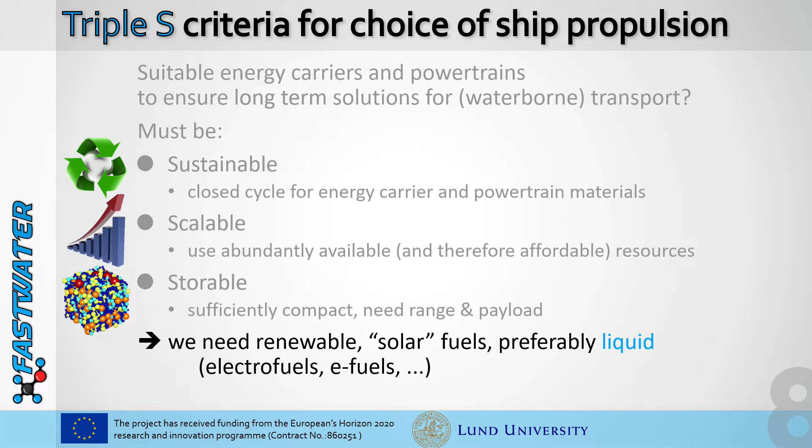So if you combine these things and then look at what we set out to do within the FASTWATER project, basically we see we have to go for renewable energy in the long run. So green electricity is what we will power a lot of things with. And this is sustainable, this is scalable. It's a huge challenge to scale up renewable energy, but we know we have enough of it, so that's a comfort. And then look how we can actually make that manageable, that green electricity.

How can we power heavy transportation with this? So then we need to look for things with which we can store that power. So we're looking at producing green hydrogen. We're looking at capturing CO2, carbon dioxide. These are things that are abundantly available, so that answers the scalability issue.

So once we start building things from these scalable resources, we need to build smart things, and we think that methanol is a very smart choice. It's the simplest hydrogen carrier that is liquid at atmospheric conditions. So that makes it storable. Having a liquid means that the number of applications you can tackle with this is much wider.

On the use of methanol, obviously CO2 will be liberated again, but if you start from captured CO2, you set this up in a closed cycle, so you don't emit any net CO2. You don't contribute to any CO2 rise in the atmosphere.

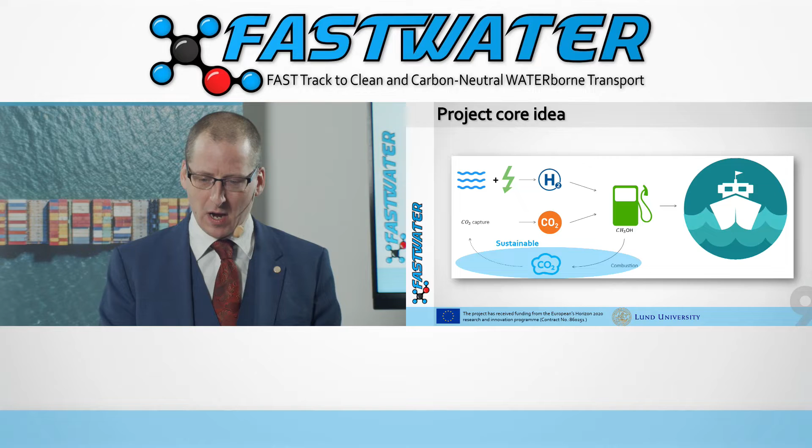So over 3 years ago, we started thinking, okay, there's a clear need for an alternative in maritime. We think this is a really strong candidate. We weren't the only ones thinking that. We saw a lot of interest growing around us. But we also saw that there were a number of challenges that still needed to be tackled.

So what we identified 3 years ago is that, first of all, a number of people really wanted to start moving into this, but were hindered by the fact that there were no methanol engines commercially available, in the power range of let's say 100 kilowatt to about 10 megawatt.

I'm happy to say that the first engine has now been launched commercially within our project. More of that you will hear a bit later this morning.

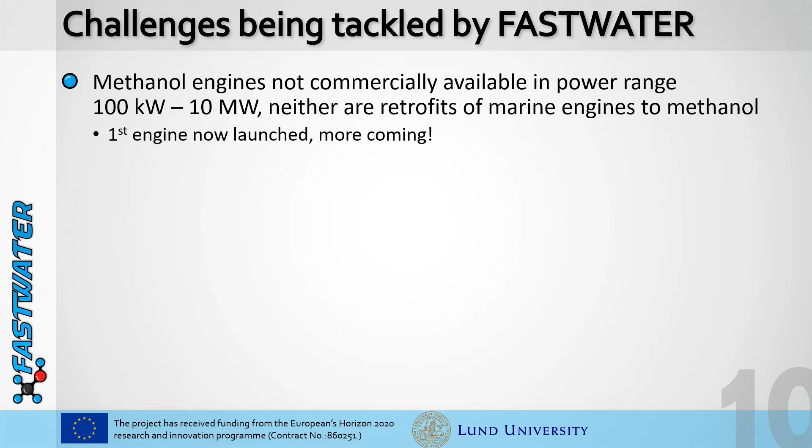A second big challenge was, okay, we need to move away from fossil fuels. Once you start looking into different fuels, it's a whole value chain that you have to start changing, from producing renewable fuel up to actually sailing on this renewable fuel. That's a daunting prospect. We needed to have demonstrators out there. We have managed to do that, and stay tuned for the following talks going into each of the parts of this value chain.

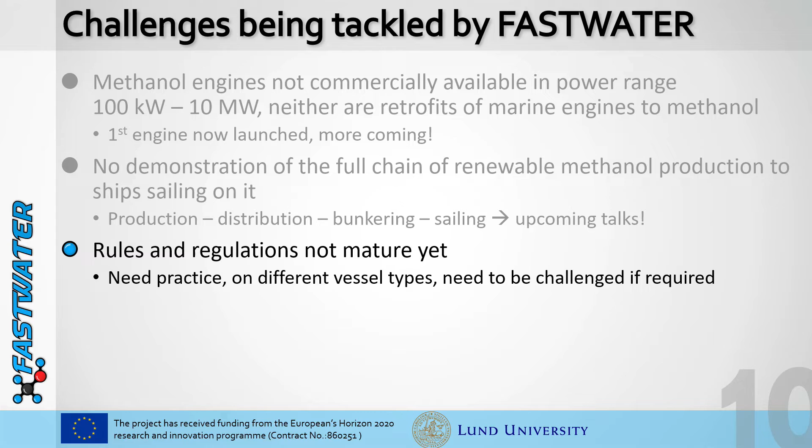Then also important, of course, is that very frequently a hindrance to introducing new things is rules and regulations. There were embryonic rules and regulations a couple of years ago. It was possible to do this, but again, we lacked experience with them. We lacked demonstration on different vessel types to really get this into our fingers - what works, what doesn't work, how should we tackle this?

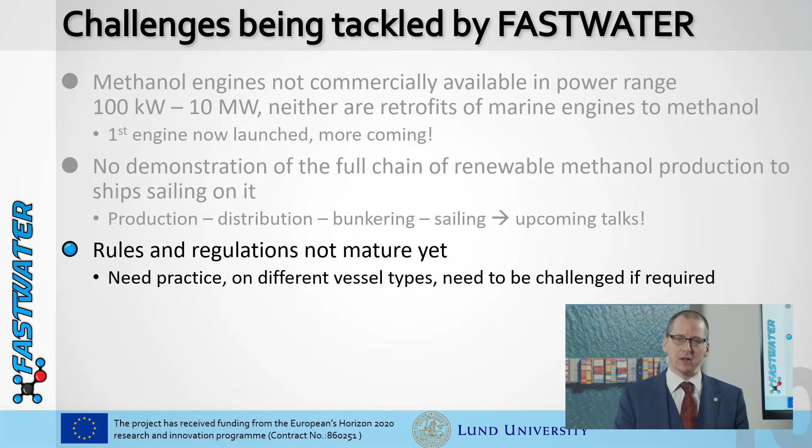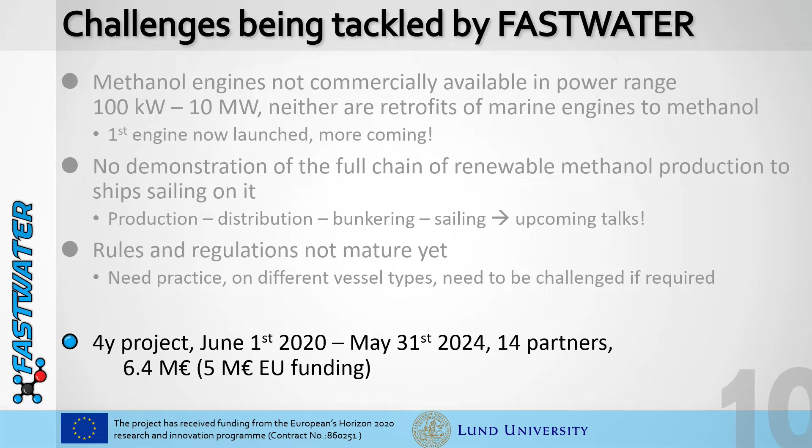So recognizing these challenges led us to submitting this project proposal to the European Commission and then getting it funded. We started about 18 months ago, June 1st, 2020, with a 4-year project with 14 partners that I'll show in a minute. So what we are doing on a daily basis now is working on engines, working on different methanol engine technologies, working on different power ranges to really make these commercially available. We have the first products out there already, and more coming soon.

But ultimately, these engines, of course, they need to end up in vessels. So within this project, the one you are going to hear about today is the launch of the pilot boat. You're going to look under the hood in a couple of minutes. That's our first demonstrator ahead of schedule. I'm very happy to report.

Besides that, you also see on the top left a tugboat that's going to be operated in the port of Antwerp in Belgium. So less than a year from now, we will hopefully have a similar launch event to also launch the first methanol-powered tugboat worldwide. And then on the bottom right, you see a Coast Guard vessel - that's 2023 we're looking at. We're going to demonstrate that in the coastal waters of Greece. And then simultaneously, we're also working out the design of a river cruise vessel, what it would mean to convert such a river cruise vessel, that you see on the bottom left, to the use of methanol.

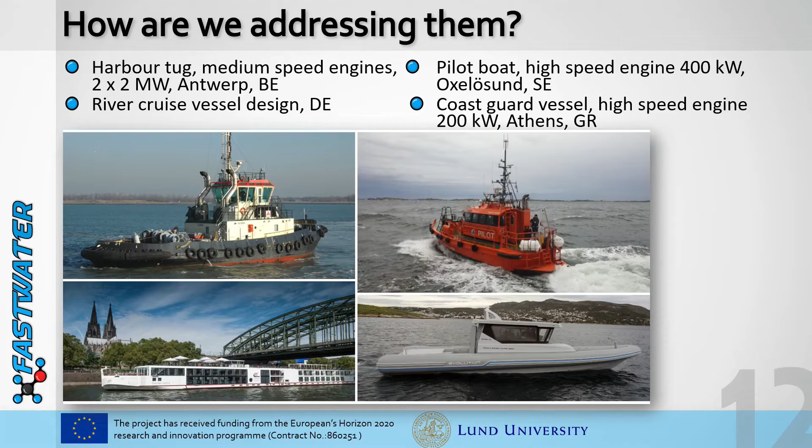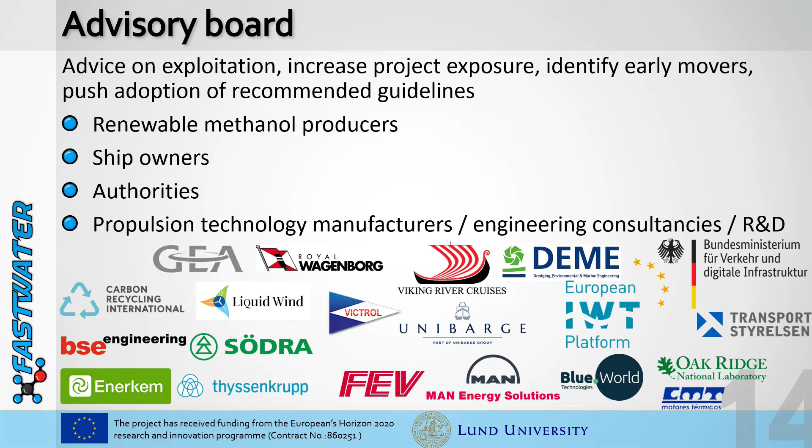So that's a number of partners, of course. I've already mentioned that quite a number of pieces of the puzzle have to start lining up to make this happen. So we're spanning quite a number of different partners from fuel suppliers, ultimately, of course, to vessel owners such as the Swedish Maritime Administration. Even that is not enough, so we're very happy to have these partners on board, but we're equally happy to also have quite a number of partners on board in our advisory board that helps us with advice on how to really make this a reality, how to exploit this, where to identify early movers, to help us out with these guidelines, to tweak them so that this all becomes feasible.

So with that, thank you very much for your attention, and I'll happily pass it over to Mr. Eelco Dijkstra from the Methanol Institute.

Thank you very much, Sebastian. Good morning, all. First of all, a great thanks to the Swedish Maritime Administration for hosting today's launch event and for giving us the opportunity to present briefly to you.

On the off chance that you may not have heard of the Methanol Institute, it is a global industry association. We represent the world's largest methanol producers, methanol distributors, technology providers, and increasingly also methanol consumers, especially also on the shipping side. Companies like MSC, Oldendorff and Maersk are all members that have joined the Methanol Institute over the last year.

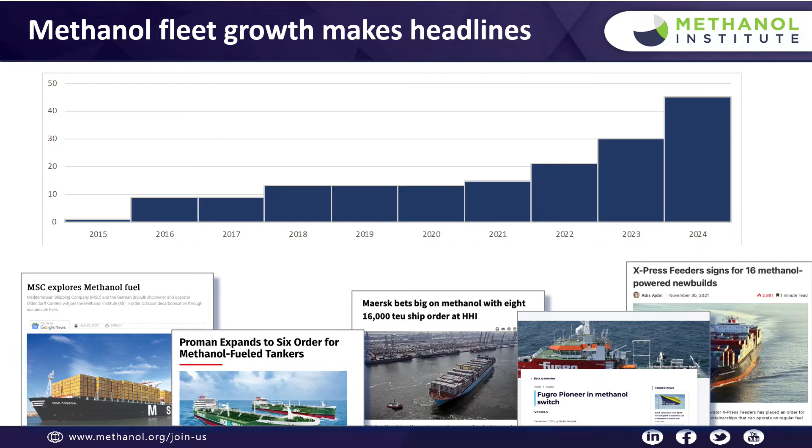Speaking of use of methanol as a shipping fuel, you only have to open up a shipping magazine or read a maritime website and you see all sorts of articles and headlines about promises of climate neutral, sustainable alternative fuels. What sets apart the different headlines, whether it's the announcement from Maersk of the 8 container vessels, or X-Press Feeders with their 16 feeders, or the 24 million euro subsidy that the Dutch government has provided for a methanol project with companies like Fugro, Van Oort, Boskalis and many others, is that methanol is not 5 years out. Methanol is happening today. We have approximately 45 methanol-powered vessels on the water today or on order.

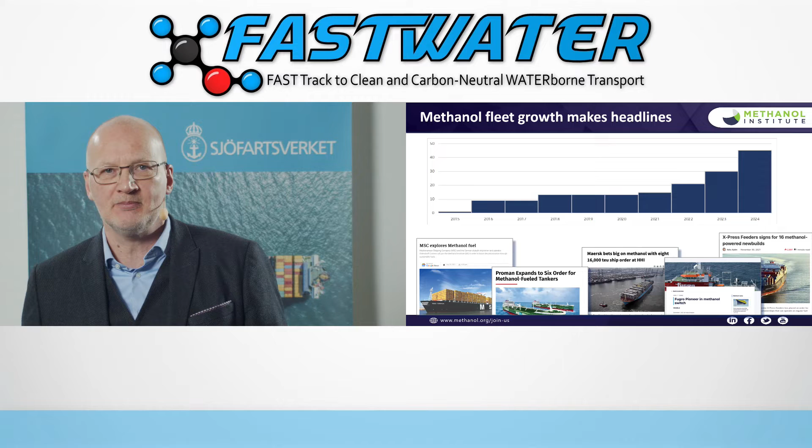There are more vessels on order as we speak, and it's only a limited amount of time before we will see the first 4-stroke engine, and really almost all major engine manufacturers are working on their methanol solutions. But the question is why are people looking at methanol as an alternative fuel? We had 2 speakers from the Swedish Parliament here today.

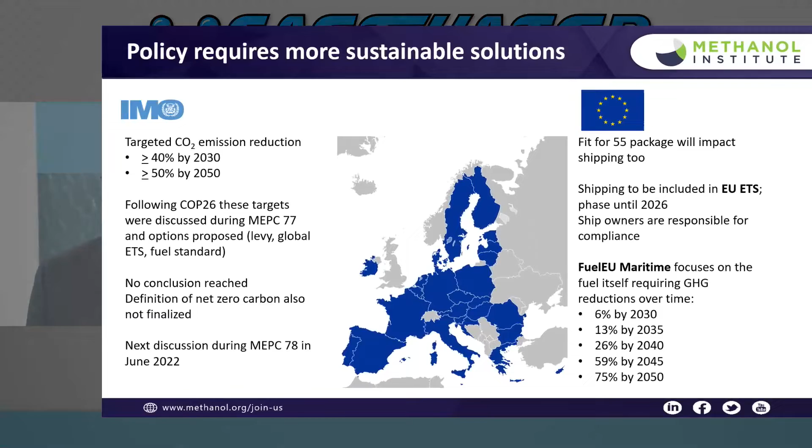Policy is an important driver behind what's happening in the shipping industry. And we tend to forget that actually the first driver for the shift to methanol as an alternative fuel was not CO2, it was the introduction of the sulfur emission control areas by IMO. So in 2015, Stena Line introduced the Stena Germanica that operates on methanol in the form of a retrofit.

Since then, CO2 has become much more of a topic in shipping. On the international stage, we have the IMO that is trying to drive the international shipping industry to lower carbon emissions, starting with 40% by 2030 to a 50% reduction by 2050.

But you can imagine that if you try and do this on the global stage, it's quite challenging, because where Western member states, Western countries and Western stakeholders feel that IMO is not moving fast enough, we have other parts of the world that are saying, well, hang on, we're going too fast. They can't even agree on the definition of what does it mean to reduce carbon. Are we talking about tank to wake, or are we talking well to wake? So it's still a very complicated discussion.

And so despite all the optimism at COP26, I'm afraid that it will still take IMO quite a long time to come to an agreement.

And then on the other side, we have the European Union. The European Union introduced the Fit for 55 package in June this year, which has implications for a lot of different industries, for a lot of different energy carriers. And in that package, there are two specific pieces of legislation that have a very big impact on the shipping industry. On the one hand, Europe aims to introduce the emission trading scheme for shipping as well, meaning that gradually, as a shipping company, you have to start paying when you're emitting carbon.

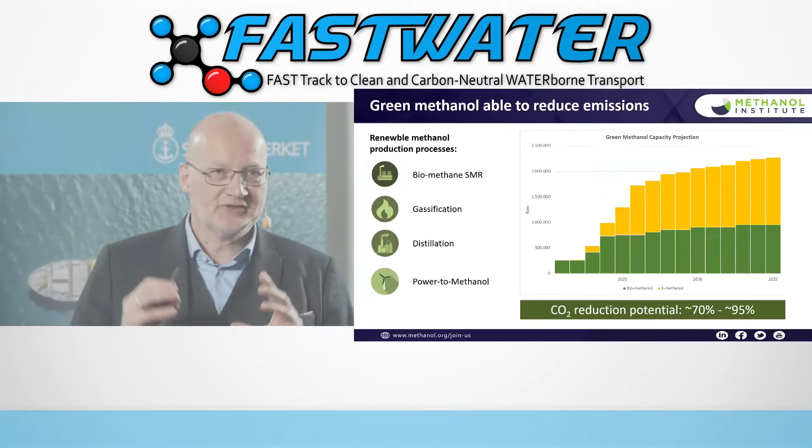Now, the next speaker after me is from Södra, and he will talk in much more detail about the specific process, which I have simplified by calling it distillation. I know that's not completely doing it justice, but we'll hear more about that. And then the last pathway, also briefly touched upon by Sebastian Verhelst, is the production of so-called e-methanol, or in legislative terms it's called renewable fuels of non-biological origin, which means as much that we take renewable electricity, convert the electricity into hydrogen, and then react the hydrogen with carbon dioxide to produce methanol.

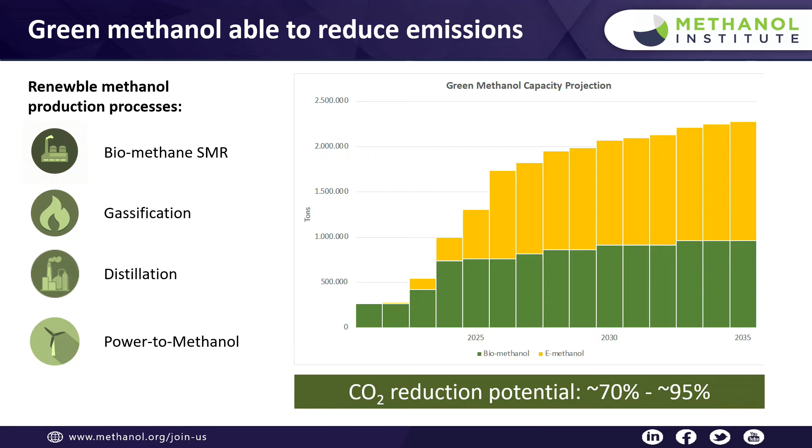And in the chart that I'm showing on the slides here, I have tried to summarize what we have seen in terms of various announcements of different projects. And roughly we see projects equating to order of magnitude about 2 million metric tons of renewable methanol in the next 10 years or so. Probably some of those projects will not come to fruition, but then again, every other week there's an announcement about a new project, so we're quite optimistic about where this will be headed. But future will only tell, and it's really a question between supply and demand.

It's chicken and egg discussion as usual.

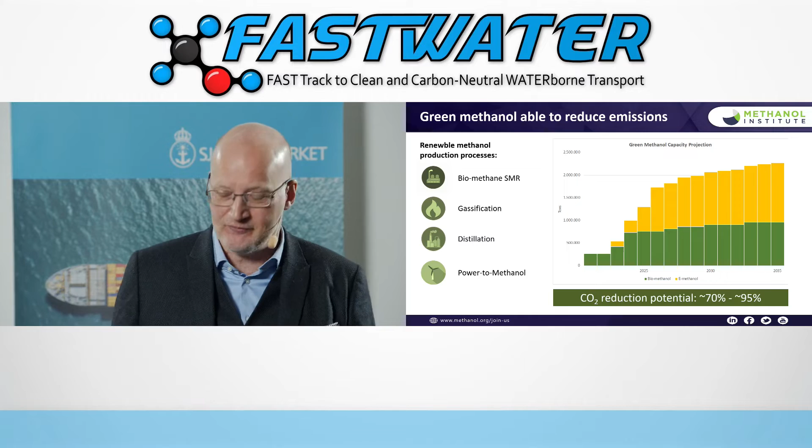So to summarize, why methanol? Methanol is liquid. Normally we'd talk about these different bullets in individual slides, but we don't have time for that. Methanol is liquid at atmospheric pressure, and it's available in most major ports around the world.

It results in immediate lower emissions, so better local air quality, but it has the potential to reduce carbon dioxide as well. Something often neglected in these discussions is that methanol is biodegradable. You shouldn't have a spill, but when you do, methanol actually causes very few problems.

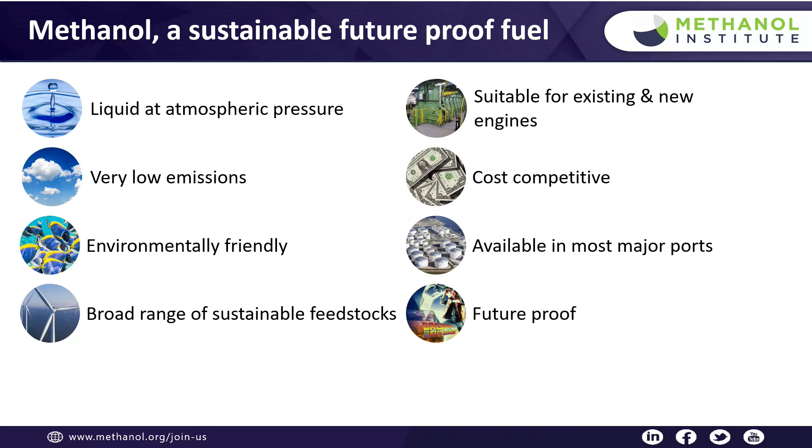Methanol can be made, as explained briefly, from a wide range of renewable feedstocks. It can be cost effective, and when you look at the various studies on the transition to alternative fuels, methanol is one of the lowest cost solutions in terms of total cost of ownership.

So really, methanol is a future-proof fuel, but it's a future-proof fuel which is available already today, and it's here to stay. With that, I'd like to thank you for your attention.

I'd like to hand over to Johannes Bogren. I hope I pronounce your last name correctly. Good enough, good enough. Thank you very much. Thank you so much.

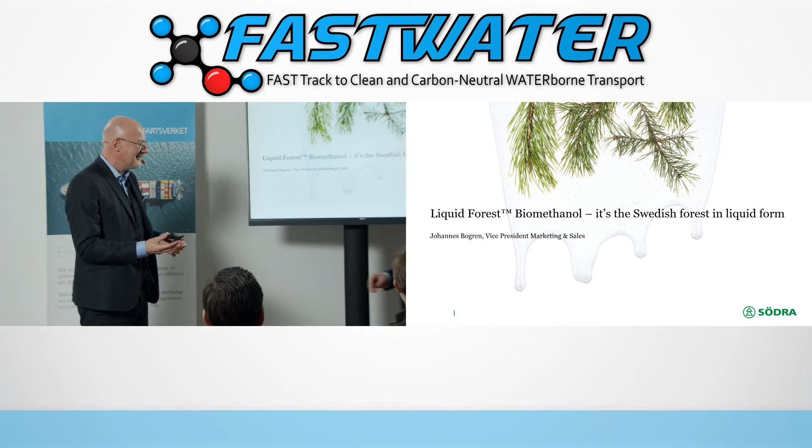Thank you, Eelco, for the introduction. Great to be here and talk to you about our product that we call Liquid Forest biomethanol. We call it Liquid Forest because it's simply the Swedish forest in liquefied form.

First, a few words about Södra, the company I represent. We are a Swedish forest industry group, owned by 52,000 forest owners in the southern part of Sweden. Our task as a company is to create value out of this versatile raw material.

We do this by creating different kinds of forest-based products. We operate sawmills that produce products used for construction and building houses. We operate pulp mills that make paper pulp, used in products like tissue, office paper, and packaging. At one mill, we produce textile pulp that's used to make textiles.

Over the past decade, we've worked a lot on our operations to be resource efficient and energy efficient. This has allowed us to start selling green electricity out on the grid, and we also supply different kinds of co-products from the mills. We'll talk more today about one of those, our biomethanol.

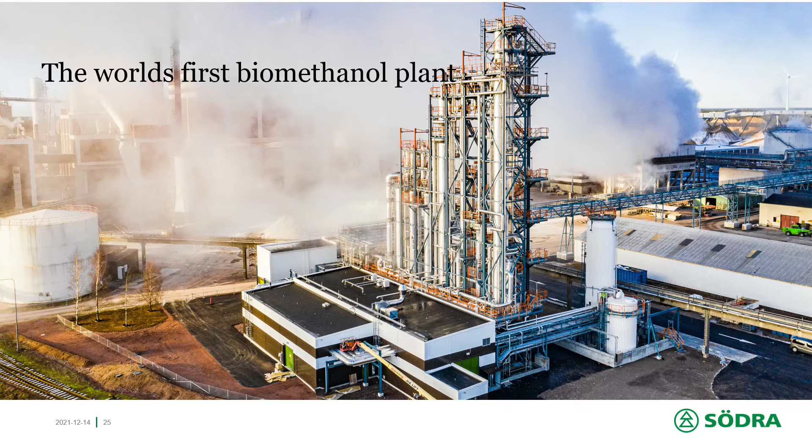We also had an inauguration about a year ago of this plant, our biomethanol plant, the world's first of its kind. It's based on in-house technology from Södra, and we use a stream from the nearby pulp mill, just behind the steam there. The design capacity of this site is 6.5 million liters of biomethanol.

Since we use wood as the input material at the site, all the energy we use is renewable. I'd say this plant is a good example of what you can achieve when you are resource efficient, because we don't do anything new — we just take out another stream that we today don't need to use anymore.

Let's go into a bit of detail about what we're doing here, because we're producing pulp — this is a paper pulp mill. We take wood chips and digest them together with chemicals in order to liberate the fibers so you can make different kinds of paper products. This pulp is washed, bleached, and dried, which is the normal main component we produce.

During this operation, biomethanol is also formed together with other volatile compounds. This mixture we call raw methanol, because it's composed of different things and it's really stinky. What we need to do is purify this stream — we remove all the other components and are left with methanol that we can sell into the market. That's a simple explanation of how this works.

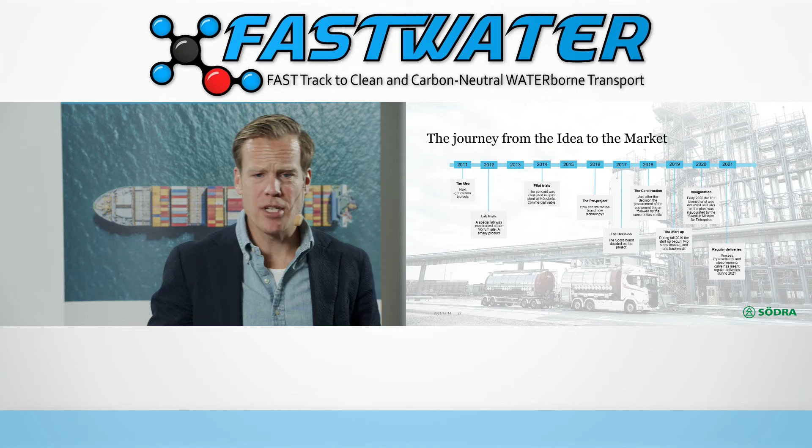Just to give you an idea about the journey we've been on, we started this project roughly 10 years ago with the first idea of how we could supply the next generation of biofuels. A year later, we had to construct a special lab because the product is so stinky, and we did it at one of our mills in Mörrum with promising results. Two years later we moved on with a pilot plant, and a couple of years after that we saw this is commercially viable. We moved ahead with a pre-project to see how we could construct this, and in 2017 our board took a decision to move on with the commercial plant. Just the day after, the procurement and construction phase started.

During fall 2019, we fired up the plant, and it was really a bumpy start, I must say. Sometimes you had two steps ahead, one back, sometimes three back - you know how it is, this is really tricky. But roughly a year ago, during autumn 2020, we had an inauguration with the Minister of Enterprise, Ibrahim Baylan, who pushed the button. Since then the mill has been working really, really good. We are now up at design capacity, and we are selling this product regularly out in the market. I was really pleased now also seeing this pilot boat being bunkered with our methanol.

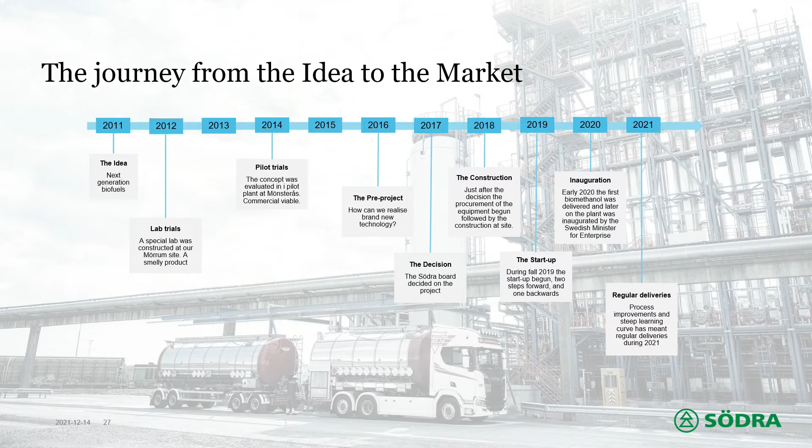Let me put the application like this: the methanol market is huge, 100 million tons plus. The biomethanol market is really a niche market. We try to find those that value a product based on the forest. Today we sell it into applications like pharma, the flavor and fragrance industry, and of course the biofuel market, which is the big one. There's a huge difference compared to our volume and the total market volume for methanol, but this kind of technology is possible for all kinds of pulp mills all over the world. If we look at that potential, we're talking about 2 to 3 million tons of biomethanol that might be produced from these pulp mills - a really resource efficient way.

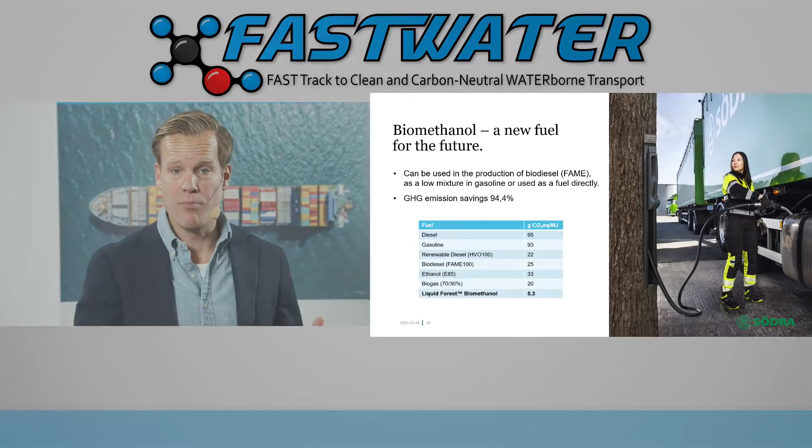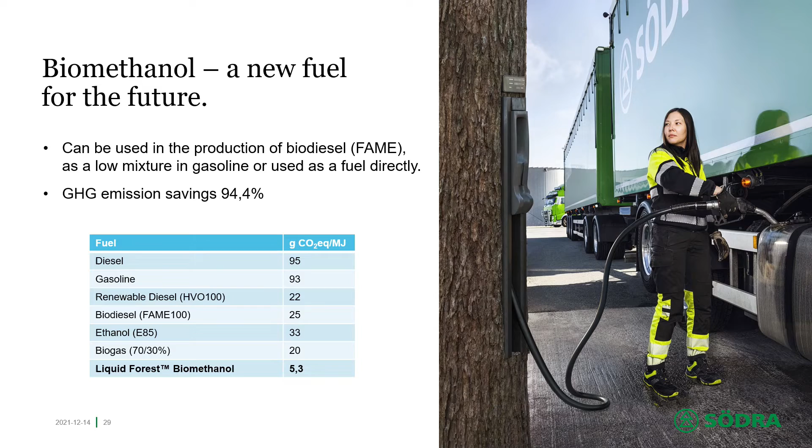Talking about biomethanol as a fuel for the future, there are different ways of using it. Our biggest customer today produces biodiesel according to the FAME process - that's one way of using methanol. Another way is to use it as a low mixture into the gasoline pool. Or, as we're learning today, use it as a fuel directly. If you use it as a fuel directly, you save a huge amount of greenhouse gas emissions - with our numbers, 94.4% that you save. If you compare it to other renewable fuels that also emit carbon dioxide, you see that HVO, FAME or ethanol emit 4 to 6 times more carbon dioxide than biomethanol. Biomethanol is really a very good example showing how you could work resource efficiently.

So I'm really happy to be here today with this new chapter for biomethanol being used as a fuel directly, and I'd like to congratulate everyone involved with this pilot boat conversion. I think this is a great way to show how we can all cooperate together and save greenhouse gas emissions. And by that I'd like to end and just remind everyone that the future is made of trees.

And now I hand over to Magnus Persson, who will talk from Malte Fuel Wash.

Thank you, everybody, for being here. I'll say a special thank you to the Member of Parliament here, and also the General Director for the Sjöfartsverket, the Swedish Maritime Office, project delegates, and ladies and gentlemen. Today it's an honor for us, because we have been chosen as the supplier to handle the fuel for this project. It's 100 years since we did the first fuel distribution installation south of Halmstad, and it's great to see new fuels coming to the market instead of what we have had before.

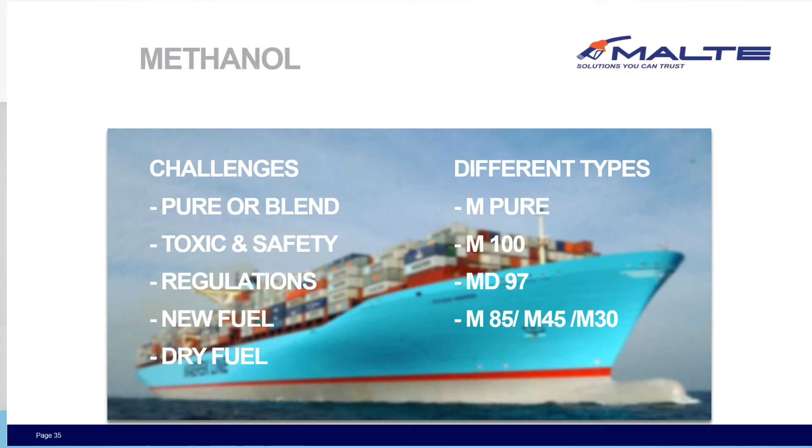Then of course everybody's talking about toxic - toxic for what? Is it toxic for human beings, living animals, nature, water? If it's toxic in one situation, it's not necessarily toxic in general. So it's important to understand the need and the danger. If petrol had come today as a fuel, it would have been sold by prescription in the pharmacy. So it's a way to understand - society needs to be educated and trained for it.

Another thing I will address, especially to the politicians here, is that we have a mission with regulation - especially in some European countries, the fire class 1 product integration in industry, which normally works with diesel or marine gas oil. That's the mission: to understand the safety aspect, take care of it, and handle it.

So with a new fuel in combination with that - when we have 170 boats or something like that - some will have a new fuel that really needs a training session, to make sure all staff understand how to handle it. And of course methanol is very dry, so we need to have lubricants also.

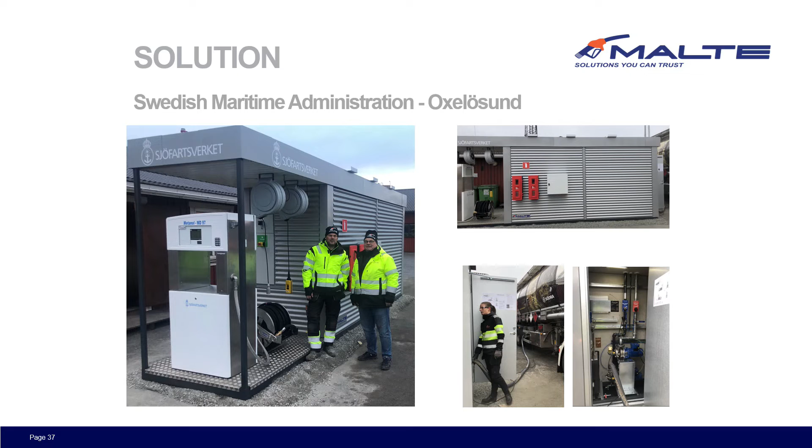But the secondary containment, leak detection, blending, special requests from the owner on how the process shall be handled to the boat, safety distance to the sea, drip-free connections - and then, of course, I take the opportunity to add some company identity and profile on it so we can see who is the owner. It's always difficult to sell a fuel which is flammable, with no packaging, hazardous, with safety aspects. Therefore, the corporate identity is important to show what we really would like to have.

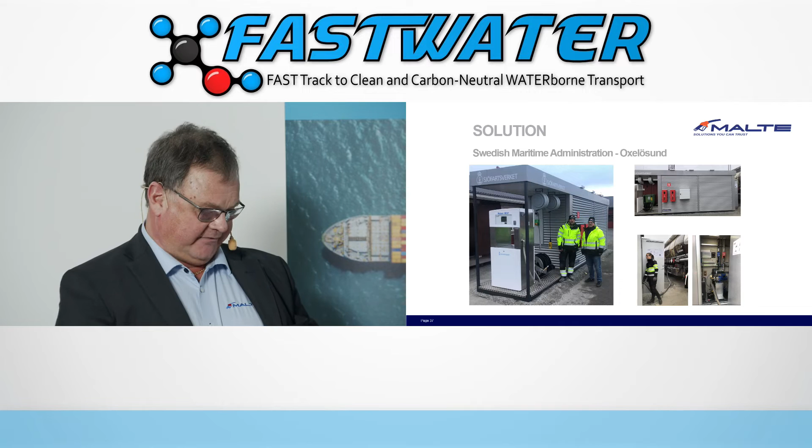I would like to also thank you, it has been a fantastic opportunity for us to increase our knowledge to handle new types of fuels for Sjöfartsverket with this MD97.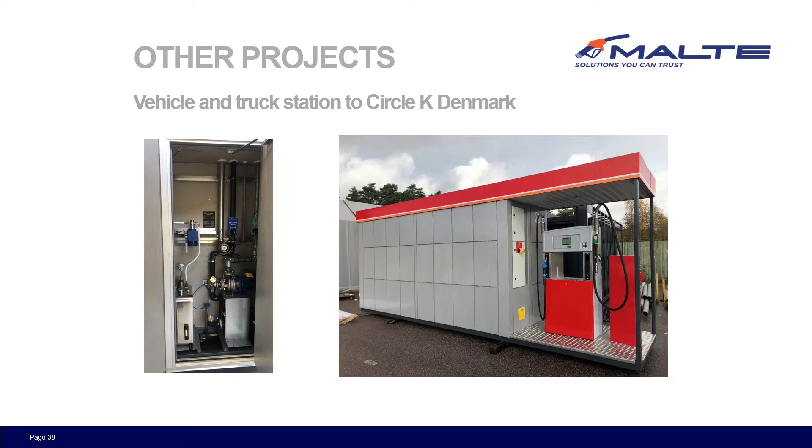But I must take the opportunity to give you some brief information on what else we are doing in the methanol area. Denmark, our neighbor country, has decided to go for 90% exchange of petrol to methanol by 2034. They are producing three types of units for blending M100 into petrol, and also M100 for lubricants for spark ignition engines. Different applications need different types of engines and different mixtures of products. So we will see MD97, M100 with lubricants, M-Pure, and M85 become the new fuels on the market for many years ahead.

In Denmark, we will see Power-to-X, electrolyzed water merged with green carbon dioxide, which will mean more or less no limitation on availability. It will be a fantastic possibility. I'm representing a very small company here, but when companies like Maersk, Ørsted, and Sjöfartsverket understand what the future is, this will really become a possibility.

But Sweden can't do it by themselves. We have a fantastic pilot project here and we're going ahead, but to be a success story it must also be introduced in other European countries like Germany, Netherlands, Austria, and Poland. And one of the issues is when we come to integrate Fire Class 1 product above ground to be flexible.

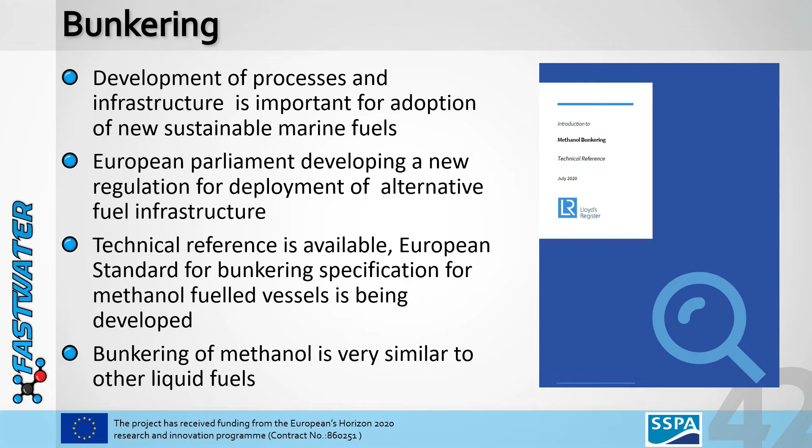On the side of methanol, there have been developments regarding bunkering specification development at a European level, and technical references to put processes in place to make the process of bunkering methanol become more routine and understood. Of course, methanol being a liquid fuel is very similar to other conventional marine fuels that are bunkered, and the same processes used to bunker these to ships can also be applied to methanol - for example, ship-to-ship bunkering, a way of bringing fuel on board in large quantities suitable for large vessels.

There has been one demonstration so far, in 2021 at the Port of Rotterdam, where a large chemical tanker was bunkered with an existing methanol barge, demonstrating the process can be carried out very efficiently using a lot of existing infrastructure already in place, which is quite a benefit for an alternative fuel.

Another method used most up to now is truck-to-ship bunkering, which is common for new fuels as they come in, when there isn't yet a market for bunker vessels delivering to large vessels. In Stockholm, for example, the Viking Mariella has bunkered methanol from the quayside via truck for their onboard methanol fuel cell installation.

And in Gothenburg, we have the well-known example of the Stena Germanica, which has been bunkering methanol by truck since 2015 and has had hundreds of safe transfers of methanol to the vessel. In this case, they have built specific infrastructure on shore to facilitate faster transfer of the methanol using pumps and additional safety equipment.

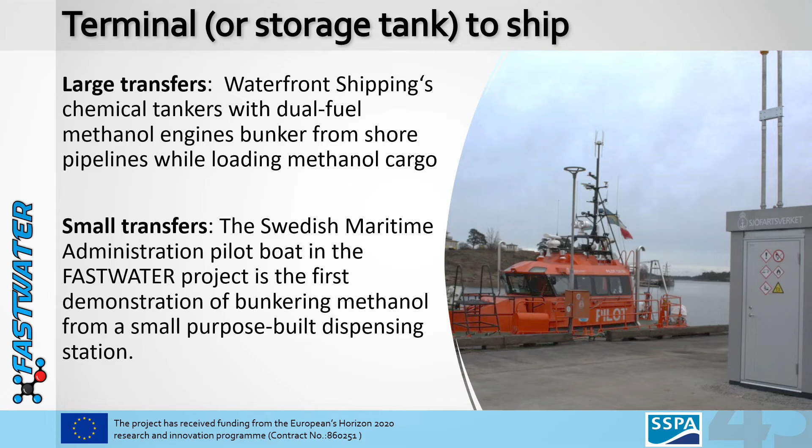A third method of providing fuel to ships, also tested and applied to methanol, is using land-based storage or a pipeline to transfer methanol to the vessel. This is being done now for the methanol tankers and chemical tankers owned by Waterfront Shipping, which bunker from a shore pipeline connection while loading methanol cargo. Today, we will see the first ever demonstration of bunkering a small pilot vessel using a purpose-built dispensing facility, which we heard about from Magnus. It's very exciting to be part of this demonstration.

I'm going to show a short film demonstrating how methanol was supplied to the Oxelösund pilot boat station, and how it's brought on board the vessel.

You can see it being transported in a road tanker - methanol from Södra, green plant-based renewable methanol - arriving at the Oxelösund pilot boat station, using procedures already in place, as road transport of methanol and other flammable liquids is regulated and a common procedure today.

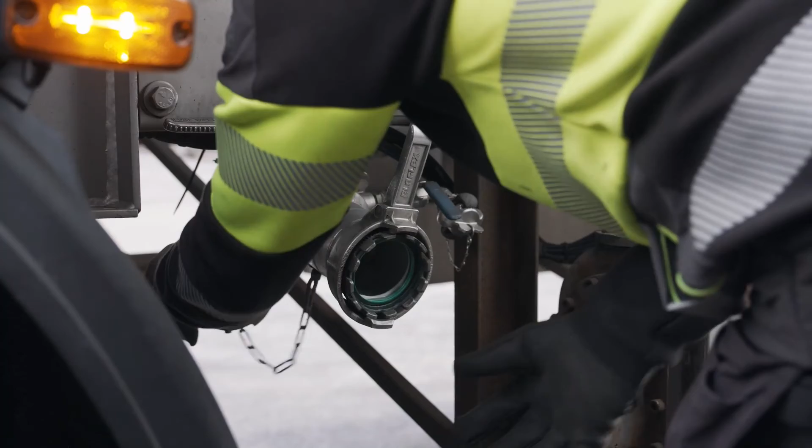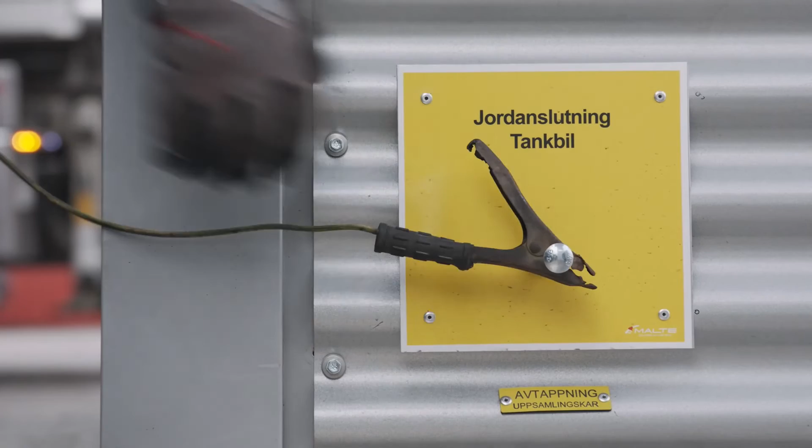Connecting the pilot boat methanol station, constructed by Malte, to the truck to transfer methanol, following required safety procedures. You can see here, for example, grounding the truck to the bunker station to ensure there's no electrostatic charge buildup, which is important for the transfer.

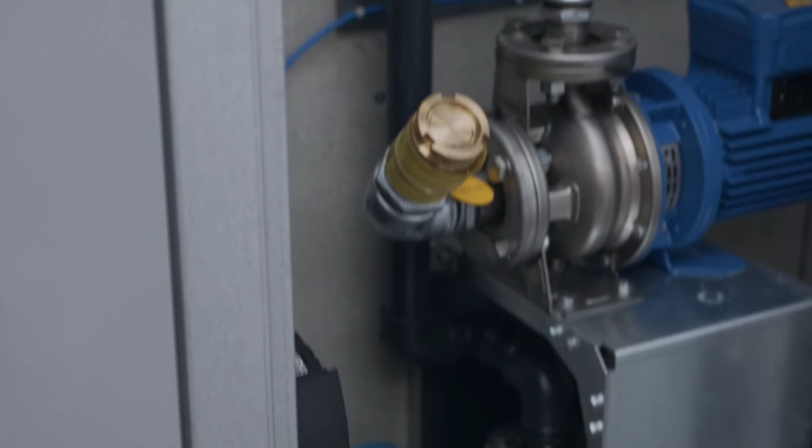Another safety feature is the hose connection, which is a drip-free connection to ensure that when disconnecting after bunkering, there will be no spill, even of a small amount of methanol.

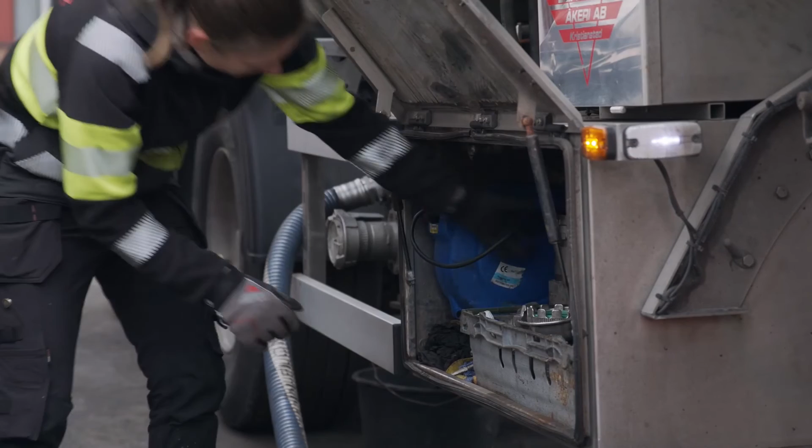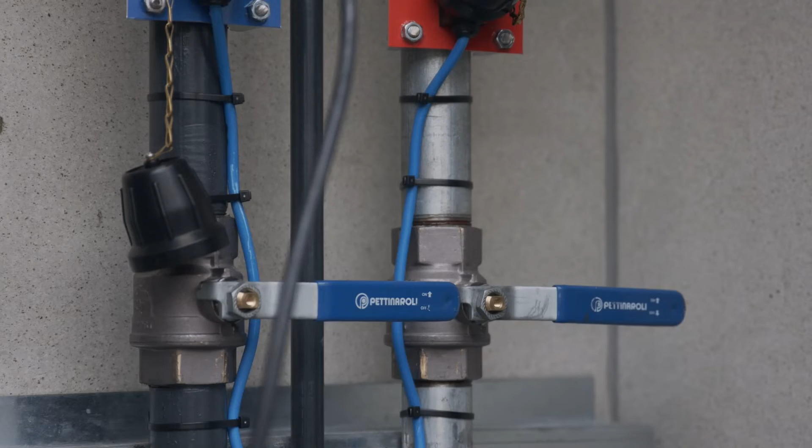Also important from a safety perspective, and required, is that the tank level gauge is connected to the truck, so when the maximum level is reached, there's an automatic shut-off, preventing any overfill problems.

Required safety equipment, of course, includes goggles and gloves, needed for handling methanol and starting up the transfer procedure.

The pump is integral to the bunker station, so the pump starts here, transferring the methanol into the station - the MD97 methanol station - where, before it's loaded to the pilot boat, the methanol will be blended with additives.

Here as well, the connection to the pilot boat is also of the drip-free type, to ensure again no loss of methanol after disconnecting. You see the connection here to the pilot boat bunker pipe.

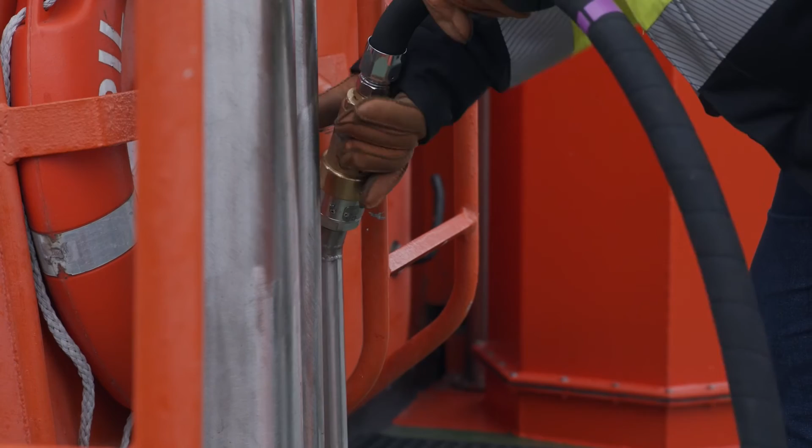There is also a tank level gauge on the pilot boat, connected to the pumps, to ensure that as soon as the maximum level is reached, there will be an automatic shut-off of the pump and no risk of overfilling.

For starting and stopping the methanol transfer, there is a handheld device that must be depressed, and as soon as it's released, the transfer stops - another safety feature.

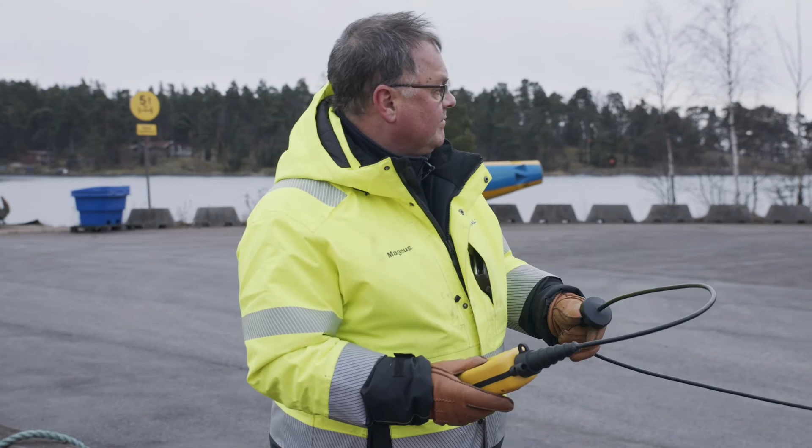Ensuring the operator can stand in location and observe both the transfer of methanol and the station. It's finished, and off goes the pilot boat.

What we're going to hear next is two speakers talking about how the engine conversion work has been developed for the pilot boat, and how the ship conversion has been done. Thank you very much, and I'm happy to introduce Mr. Albert Wistrom of the Swedish Maritime Administration, who has worked so hard and been instrumental in this pilot boat project.

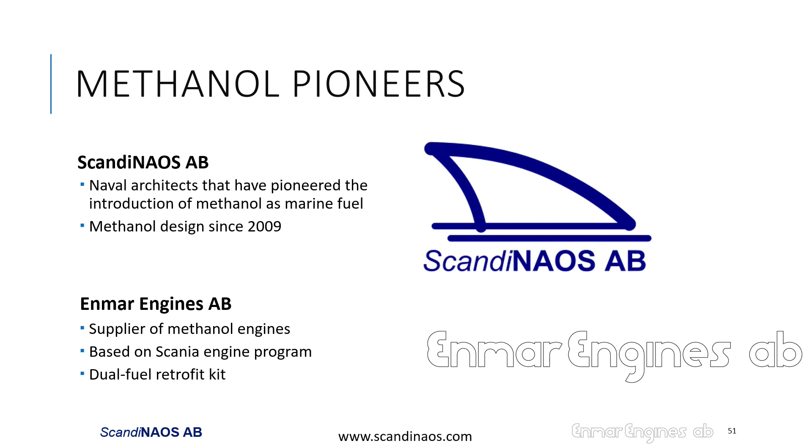Our company ScandiNAOS started in 2005. We have been into methanol design since 2009. We like to call ourselves methanol pioneers, and there's some substance in that saying, because we have taken part in a lot of methanol conversions and methanol design projects over the last 12 years now, all the way from large RoPax ships to pre-studies, smaller boats, and now also pilot boats. We've been involved in many real projects, so real conversion designs.

We started a sister company, Enmar Engines, that will only focus on methanol engine production. Within ScandiNAOS, we have developed methanol engines for 5 years now, and we have seen that there is a huge request on the market for this size of engines. So that is the background for that.

This is the pilot boat 120 SE. It operates in Sweden by the Swedish Maritime Administration. It has a length of 14.4 meters and width of 4.6 meters, so it's a typical pilot boat. It has a single engine, a fixed propeller, and this is the boat converted to operate on methanol, which you see on the illustration here.

The boat, if we start from the front, we can see a forepeak. Then we can see the bulkhead below deck. We have the engine room, and then aft we can see the fuel storage room or the tank room, which is also the rudder room.

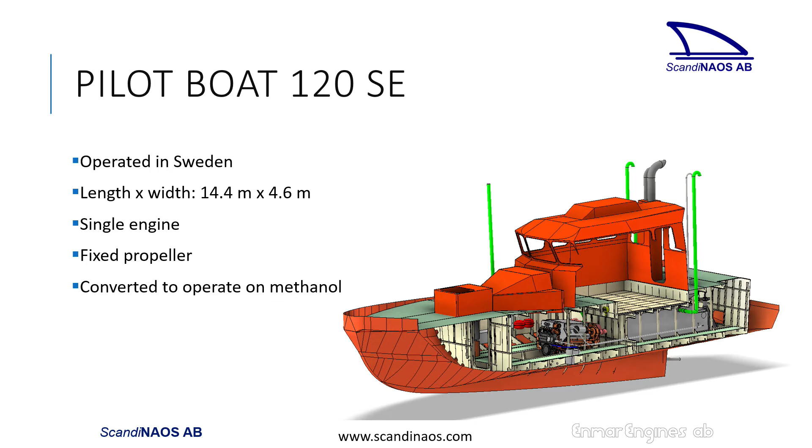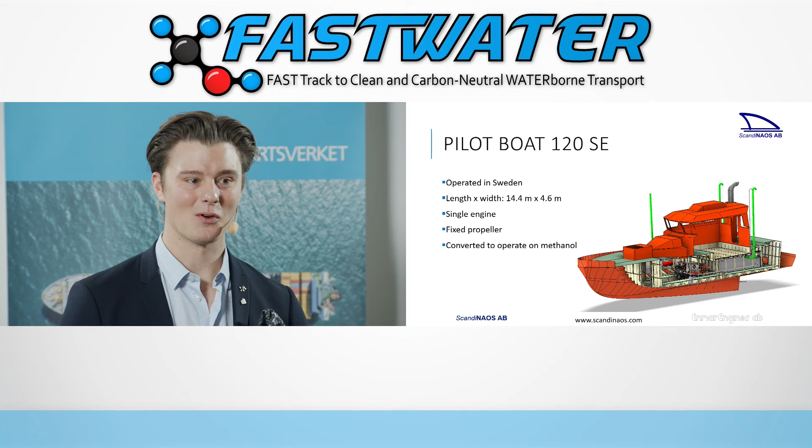I will tell you very briefly why we should use methanol as a fuel, why it's good for us, and then you have to allow me to become a bit more technical in my presentation. I hope you appreciate it.

So why should we use methanol? Methanol is a clean burning alcohol. There's no sulfur in the fuel, and if you don't have sulfur in the fuel, you will not have sulfur oxides formed in the combustion. Sulfur oxide is in some cases recognized as SOx. So this boat, using methanol, will not lead to any SOx emissions.

Methanol is a simple alcohol, and when combusting methanol, no particles are formed. It's actually physically not possible for methanol to form particles or soot, which are other words for long carbon chains. This is not possible, so we will not have any particulate matter formed from this type of engine.

Methanol also reduces the emissions of NOx, nitrogen oxides. Nitrogen is not part of the fuel, but it's part of the air that goes into the engine, and in the combustion, in the chemical reaction, NOx is formed. Since methanol burns cool, it has a cold combustion, we will have reduced emissions of NOx.

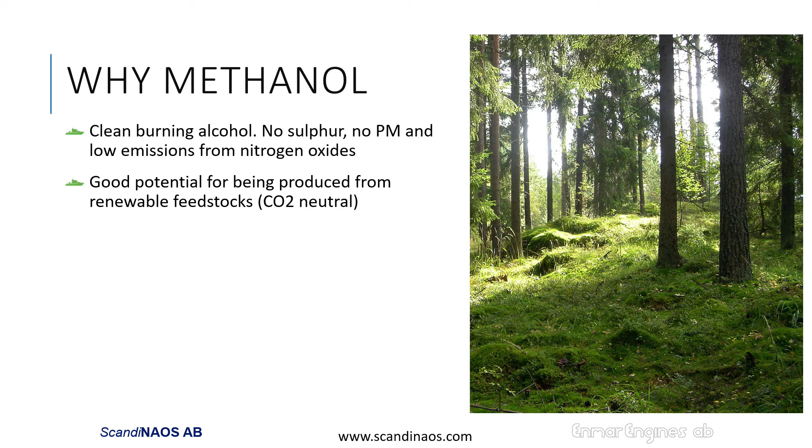As my previous speakers told us, methanol has a very good potential from being produced from renewable feedstocks, both as biomethanol but also as e-methanol, which is produced from renewable electricity.

Methanol is biodegradable, does not bioaccumulate in aquatic environments, so we shouldn't have a spill, but if we have, especially in a marine environment or marine sensitive environment, it's highly important that we do not cause any environmental problems.

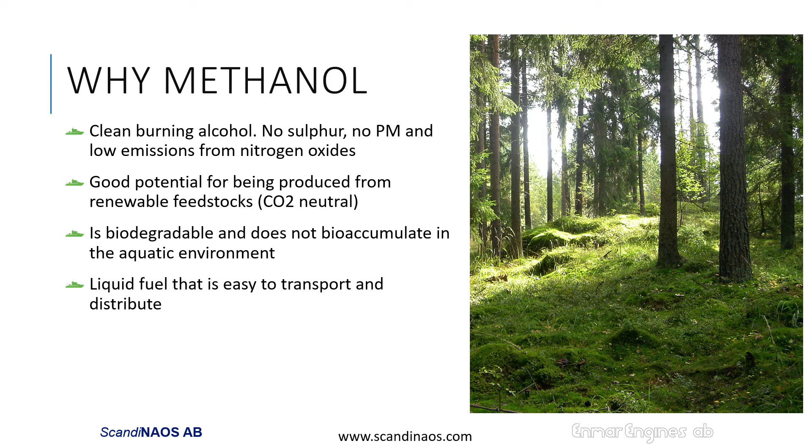It's a liquid fuel that is easy to transport and distribute. From a logistic and transport point of view, we can always discuss different technologies for how to transport it and the challenges, and it is an important fact that is covered here. But liquid methanol is more like diesel to transport than transporting a gas, for instance cryogenic gas or compressed gas. So it is, after all, a quite simple mixture, a quite simple liquid to transport.

And the potential is to get down to zero by using e-methanol. We heard earlier a very good example of biomethanol, which also has very good carbon dioxide emission performance.

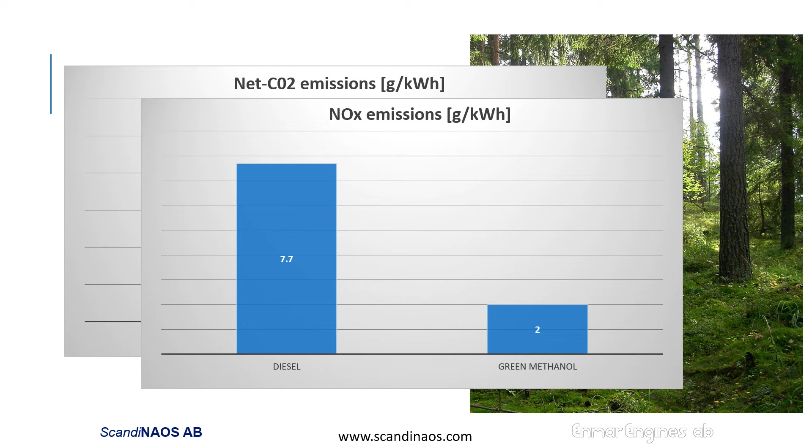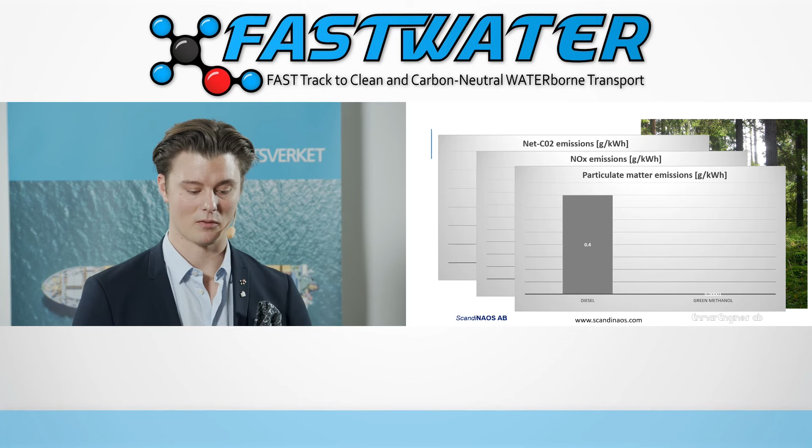The pilot boat 120 SE is a conversion of an existing vessel. There used to be an IMO Tier 2 engine installed on board, where the emission of NOx is 7.7 grams per kilowatt hour. Producing the same power, we reduced this to 2 grams for the engine installed now. Particulate matters are not formed in the combustion of methanol, so this is reduced to zero, compared to the previous engine installed on a pilot boat, where the emission is 0.4 grams per kilowatt hour.

I will go through some design challenges of a methanol ship. Methanol has different properties than diesel. It's not in all cases a worse or more difficult liquid to handle, but we have a standard level of how to handle and make a diesel installation, how to handle diesel fuel on board. Methanol has different properties.

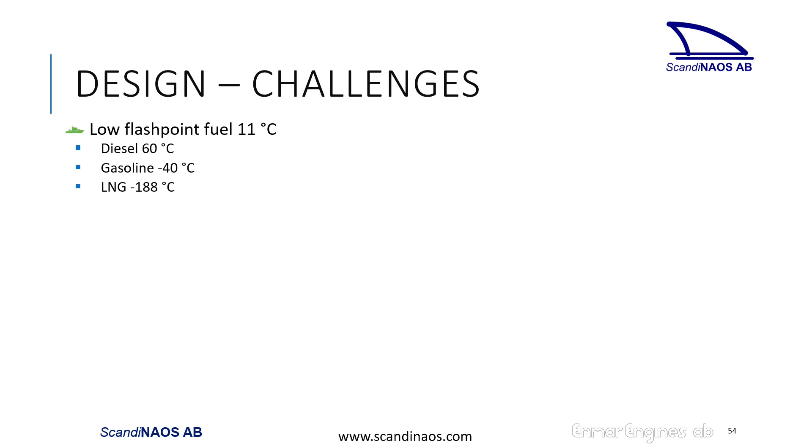Some of the challenges we need to cover is that it's a low flash point fuel. The flash point of methanol, or any fuel, is easiest described by having it in a pool. If we imagine a spillage or pool of methanol, and we have a certain surrounding temperature, in this case 11 degrees for methanol, the vapor produced from this pool is enough to create a flammable atmosphere. If we have an ignition, we could have a fire, or we will have a fire. The same goes for diesel, but there the temperature is 60 degrees. Gasoline requires a temperature of -40 and LNG -188. Since 11 degrees Celsius is quite normal on board a ship in our environment, we need to find a design to handle this challenge.

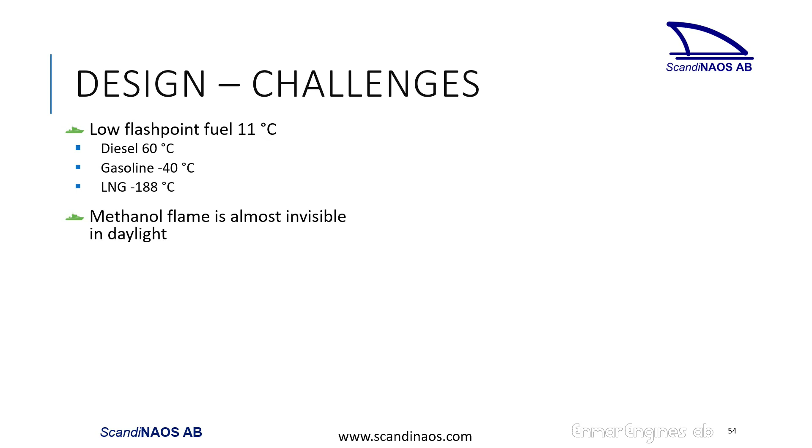Methanol flame is almost invisible in daylight, so we need to find another way of detecting a methanol fire than the traditional way. The reason methanol is more difficult to see in daylight is that it doesn't produce any soot. So a diesel or gasoline fire has an intense orange-yellow color, while a methanol fire is more of a blue flame.

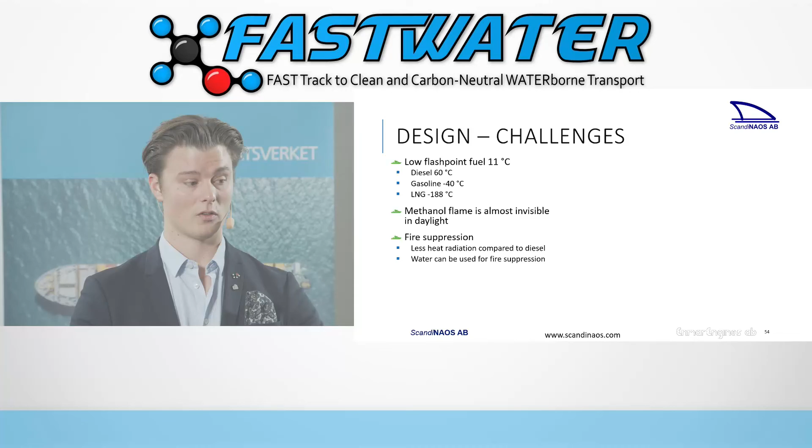On the other hand, we have some benefits for fire suppression. Methanol has less heat radiation than a corresponding diesel or gasoline fire. So if we have a fire, the heat radiated from the methanol fuel is lower, meaning you can stand very close to a methanol fire without hurting yourself from burn heat injuries. It's also possible to extinguish the fire using water.

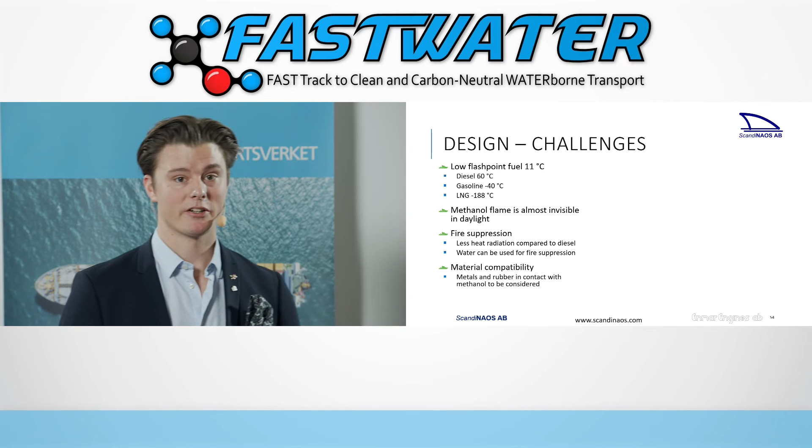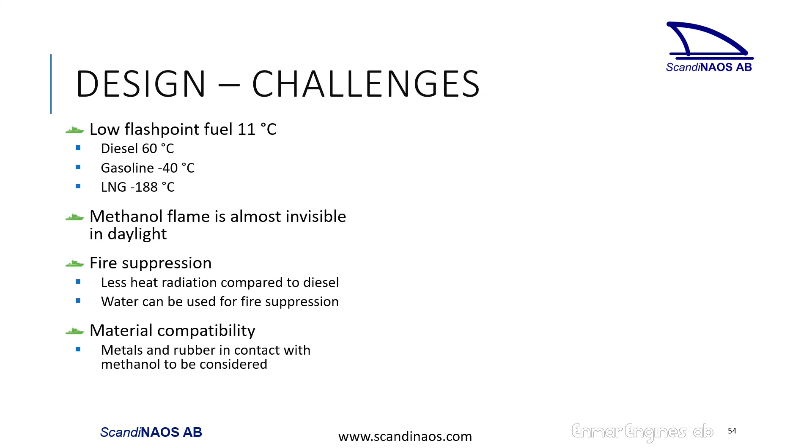We have some challenges with material compatibility. Material compatibility in terms of metal and rubber in contact with fuel needs to be evaluated all the way from the tank through the fuel lines and also in the engine. We need to be aware of all the materials where methanol is in contact. It's not worse than diesel, but other materials and other rubbers and metals need to be considered, so it needs to be evaluated all the way.

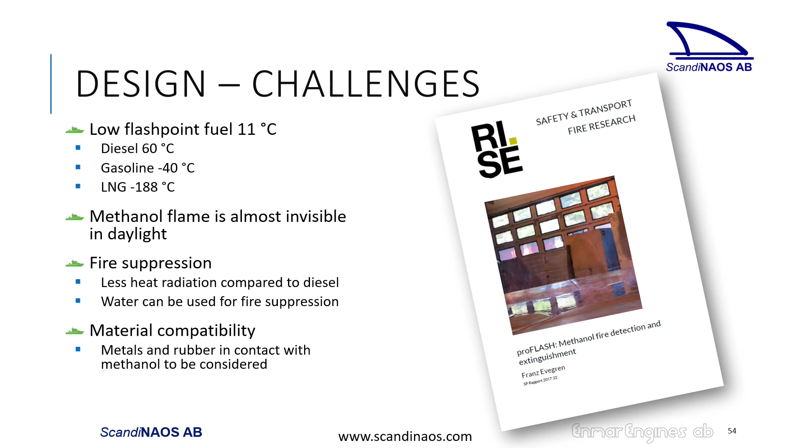Luckily we have some experience from previous projects. We have a research institute of Sweden, RISE, who has been evaluating methanol fires and how to handle fire and leakages, and we also have extensive, quite rigid experience from previous projects, both in my company ScandiNAOS, but also in other companies and organizations for how to handle this type of challenge.

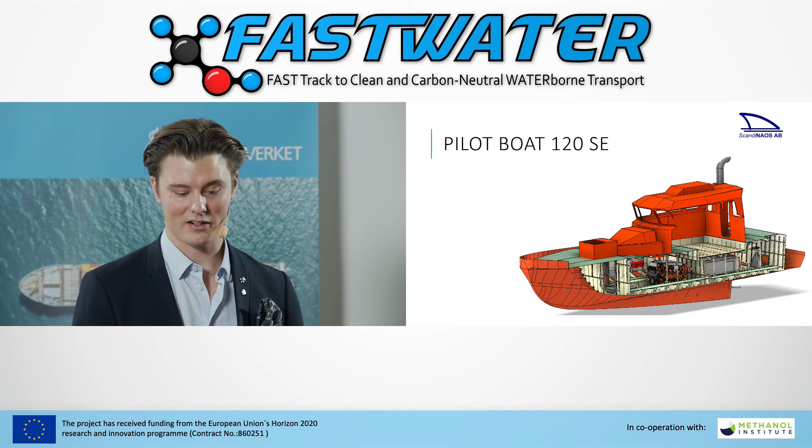This is the pilot boat before it was converted to methanol, and I will show you the next slide which shows the full conversion. So I will go back again, and then we'll go forward again. You can see that some components are added in the design, and I will go through them.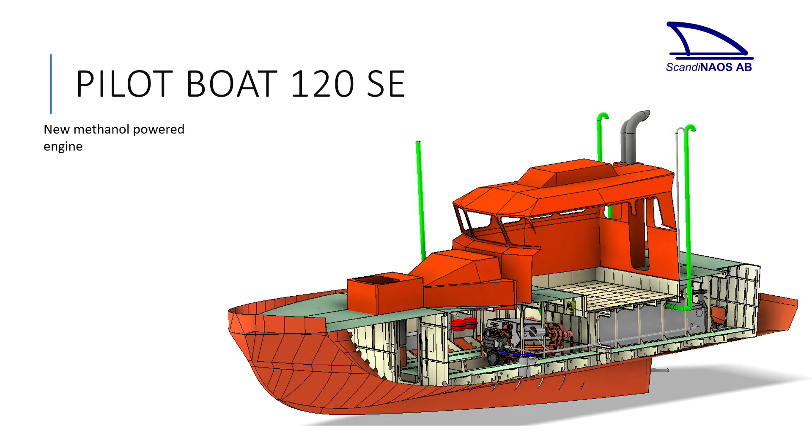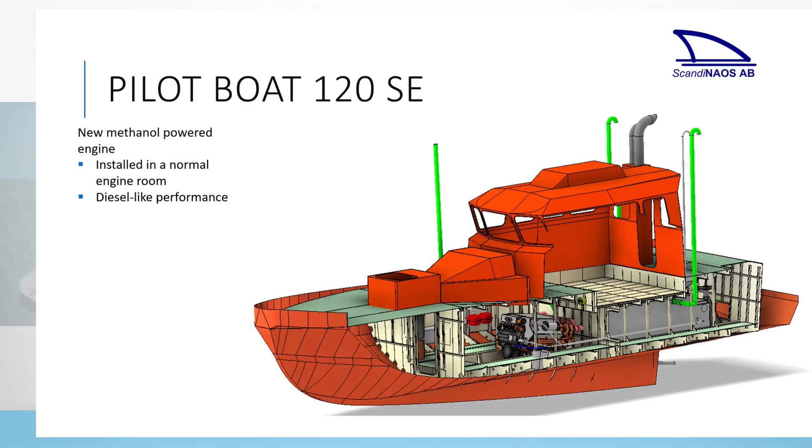There is a new methanol-powered engine installed. As I said before, we have the forepeak, and then after the forepeak we have the machinery room. This engine is a methanol-powered engine based on a diesel engine. I'll go through it more in detail later, but the physical dimensions of the engine are like a normal diesel engine. The engine is connected to a gearbox, identical to any reverse gear installed for a diesel engine. It has the same propeller shaft and the same propeller as with the previous diesel engine. This means the engine needs to have the same performance or drivability as a diesel, and it has, and that is what it's dimensioned for.

We have double-walled fuel pipes and a double-skin tank, or double-walled tank. If we take a look at the aft of the ship, we can see there is a rudder room aft of the engine, and the gray unit you see there is the fuel tank. The fuel tank is designed from stainless steel, built as a tank inside a tank, with an inner tank and an outer tank separated by a small interbarrier space.

The inner tank is filled with methanol, and the outer tank acts as a second safety barrier, because we do not want a leakage in the ship. So if we have a leakage from the inner tank or any component connected to it, we can detect it and send an alarm, but it's still contained in the outer tank, so it's still safe to operate the ship.

The same goes for the fuel lines, shown in gray in this illustration, from the fuel tanks up to the engine—those are double-walled. So if the inner pipe had any leakage or broke, this would be collected and detected in the barrier space, so there's no risk for the people on board or for the safety of the ship.

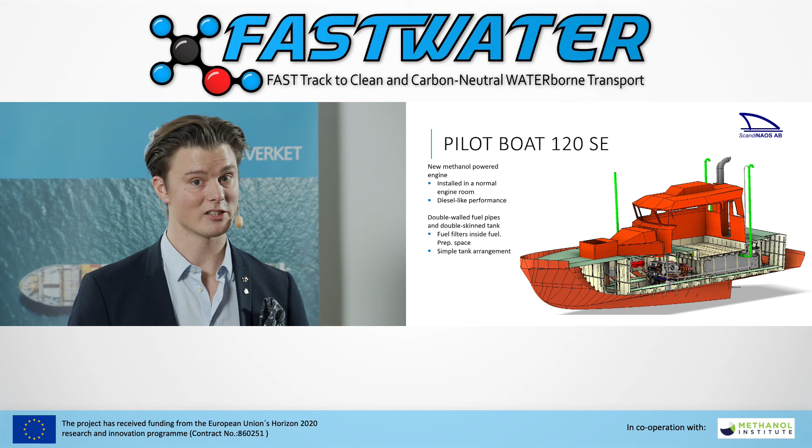We have leakage alarms for methanol leakage to detect this and give an alarm. There is one alarm placed inside the engine room, one alarm placed on top of the engine, and one alarm placed in the interbarrier space between the inner and outer tank.

And for fire safety, as we said earlier, if we have a fire, the flame could be difficult to detect in bright daylight. For this reason, the traditional smoke detectors are also complemented by heat detectors, so we have an extended fire detection system on board.

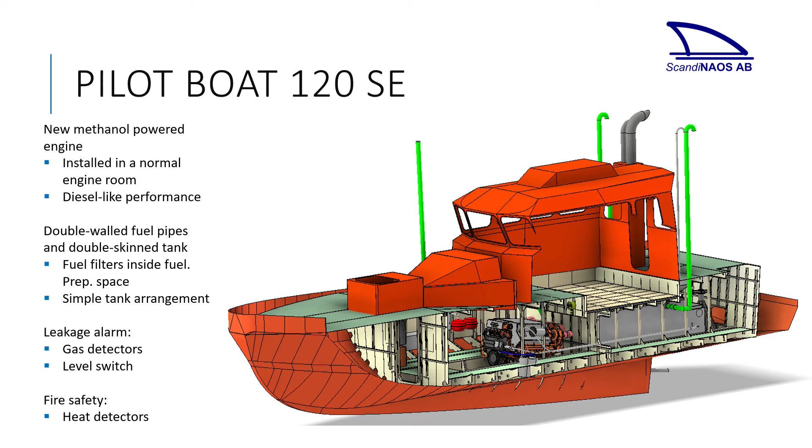So let's talk about the engine. The engine is based on a well-proven Scania V8 engine. It's a Scania diesel engine converted to operate on methanol. This engine, which you see here in the photo, is the actual engine being installed inside the pilot boat.

The engine is compression ignited, so it utilizes a few tricks to make this technology work. Traditionally, methanol is easier to ignite with a spark plug—you spray it, mix it with air, and ignite it with a spark plug. But this is not the technology we are using, and there are reasons for this. One of the most important is engine performance—we want the diesel characteristics of the engine, the diesel performance. I'll go more into that later.

To make this work, we need to replace a few critical components inside the engine. First, the compression is increased to make the methanol auto-ignite more easily. Second, we use a dedicated methanol fuel system for the fuel injectors and fuel lines on the engine. The methanol is also mixed with 3% ignition improvers, which makes it behave more like diesel fuel. I want to highlight that this is not a dual fuel engine—it's a single fuel engine. It's a premix of methanol and the ignition improver, which is bunkered to the tank on board the ship, then transported to the engine and ignited as a single fuel.

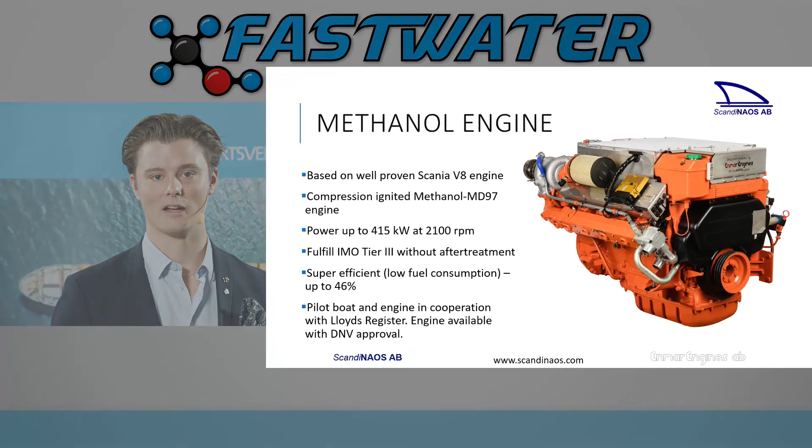What you see in the photo here is everything that is delivered to this ship in terms of the physical engine, and we can still comply with IMO Tier 3.

It's very efficient. For certain parts of the operation profile, we can have an efficiency up to 46%. On a cycle value, taking into consideration the whole propeller curve - low speed, medium speed, and high speed - we are well above 40% cycle efficiency, which we are very proud of.

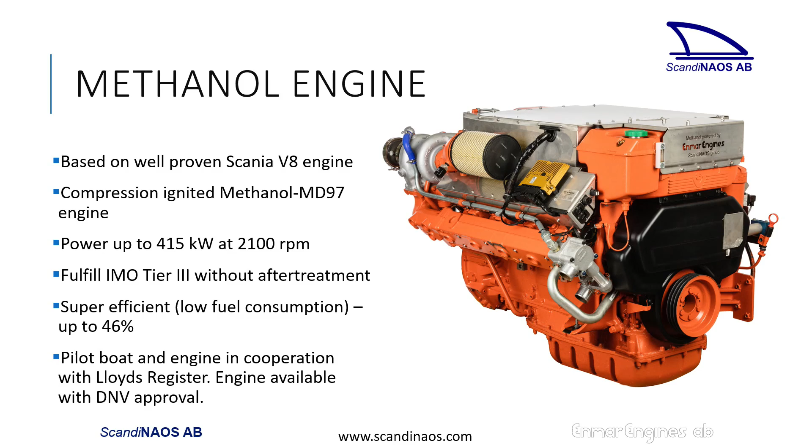The pilot boat and the engine is developed in cooperation with Lloyd's Register, so they have taken part all the way through this development process in different types of risk assessments. And in a parallel project to the FASTWATER project, we have also been involved in a process for DNV approval. It's an identical design of the engine for both the Lloyd's and the DNV here.

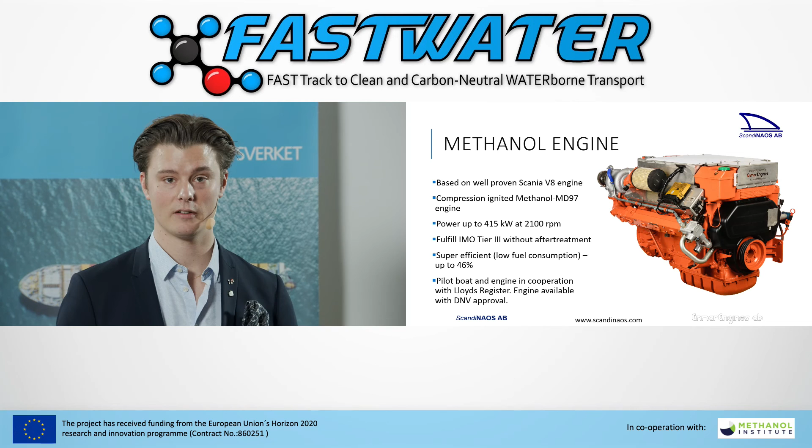That's important for many reasons, but for example, in an installation on board a pilot boat, this is actually a critical safety aspect. When you can imagine that you drive the boat in hard weather up to a larger ship, and then you have waves that take you both back and forth, you need to be able to have the immediate torque, the immediate response to get out of this situation. It could be reverse or going sideways, but you always need this amount of low RPM torque from the engine.

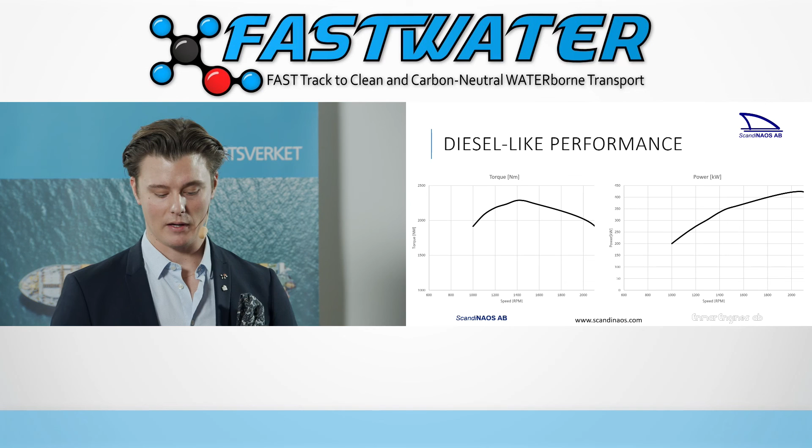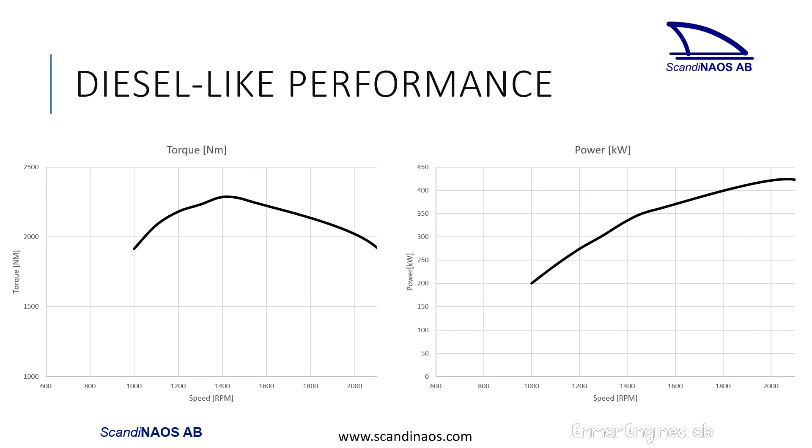Taking a look at the power curve, we can see that the power curve in the RPM between 2000 and up to 2100 is quite flat, and this is also something we wanted to achieve. This means that the propeller matching is easier. We do not have to meet a specific point at the top maximum power - we have some margins to play with, and this is also something we wanted to achieve. So we're very proud of this.

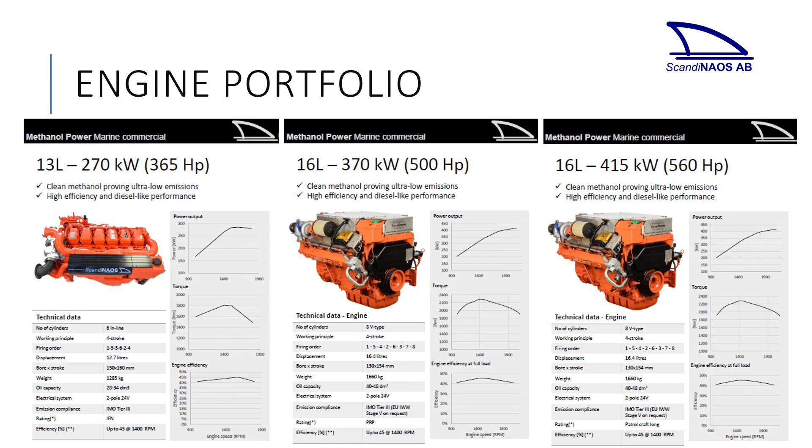ScandiNAOS has a broad engine program. We have developed this engine on board this ship, but we can also develop the engines for the smaller or larger engines - the 13 liter, and also the 16 liter - utilizing the same technology. We have examples of this, both from land side as mobile power, and also from the marine side as generator sets, and as in this case, a propulsion engine. Here are some examples of data sheets.

Some conclusions on the ship conversion and the engine. The ship conversion is very simple - it's based on standard components, and this is actually technology both when it comes to the ship and when it comes to the engine. This is technology that is available today. This is not rocket science, this is not future technology. We have shown in this project that we have the technology available today.

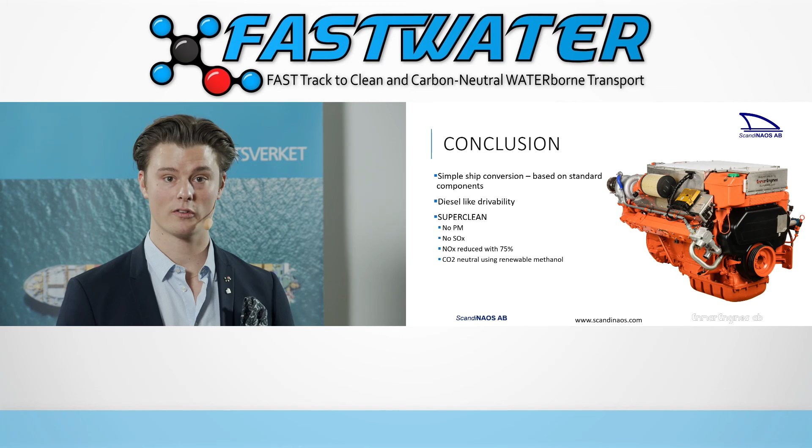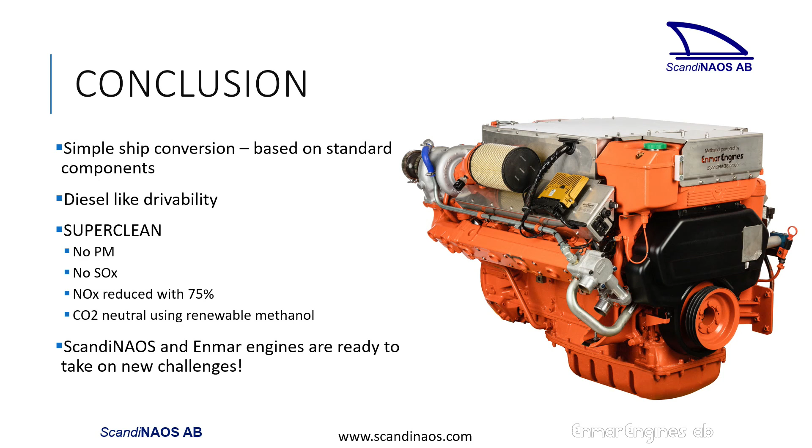The engine has diesel-like drivability, and it's super clean. We have no particulate matters, we have no SOx, NOx is reduced by 75%, and it's now CO2 neutral using renewable methanol, in this case from Södra. ScandiNAOS and Enmar engines are ready to take on new challenges. So thanks from the ScandiNAOS team.

I hand over to you, Fredrik, for some closing words.